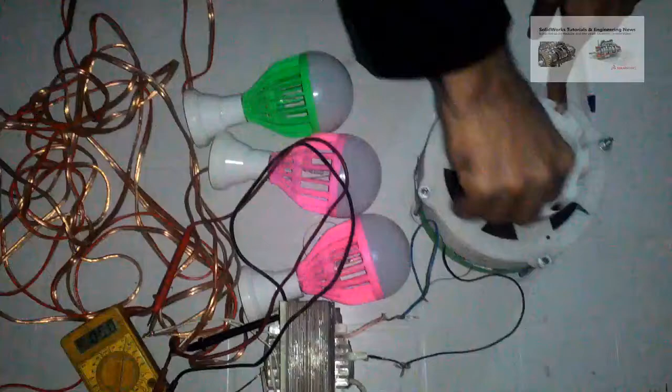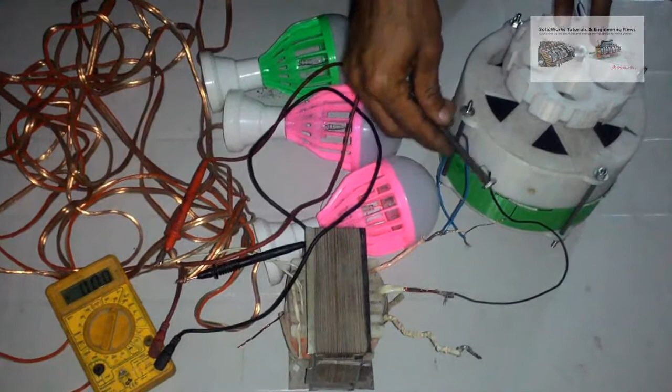In this video, I am going to tell you how to make 3D printed single and multi-stage permanent magnet AC alternator. I will tell you each and everything about this, like number of poles, number of turns, and the shape and size of magnets. I will also share the SolidWorks and STL files that you need to 3D print this alternator.

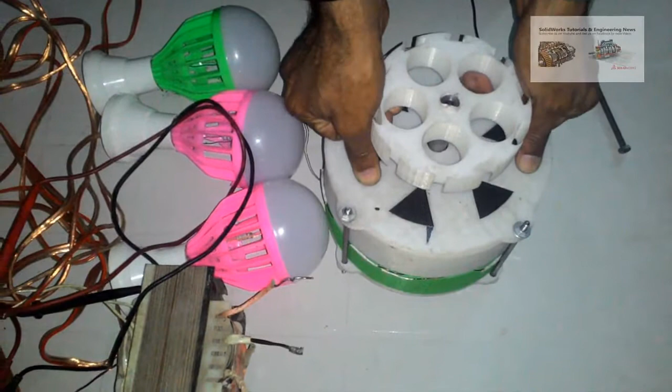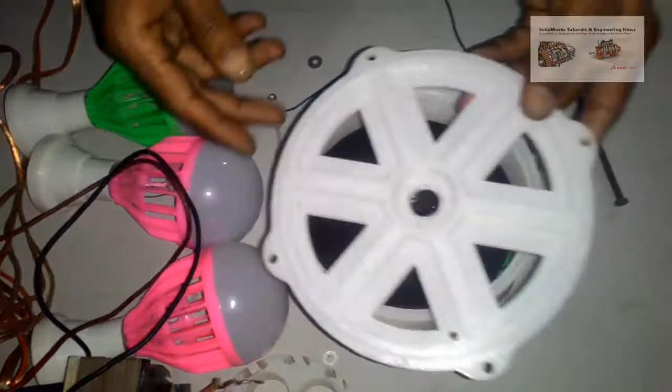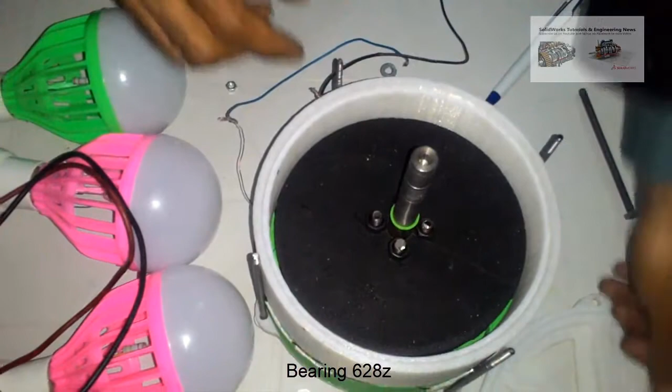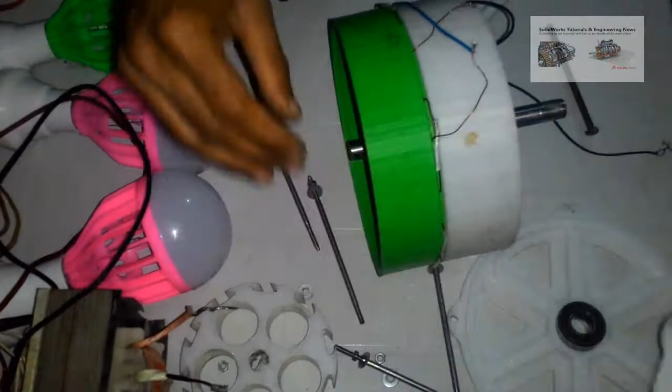Let's disassemble this single stage alternator to talk about its characteristics, and then we will talk about the multi-stage alternator. So let's start. Unscrew these bolts and disassemble it. So this is the side cover, and it also has the bearing slot here. Here is the bearing and the bearing number is 628Z. This is the other side cover with bearing, same bearing 628Z. Both side covers are identical.

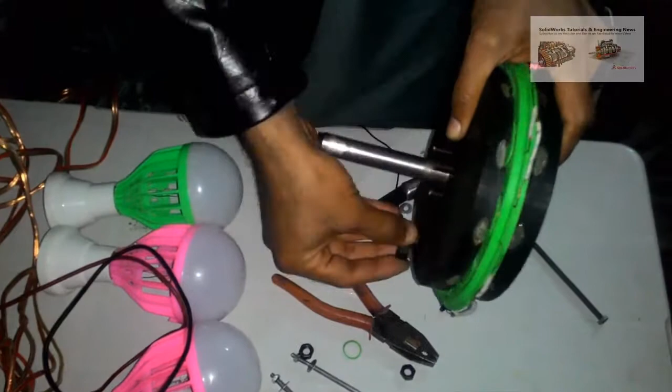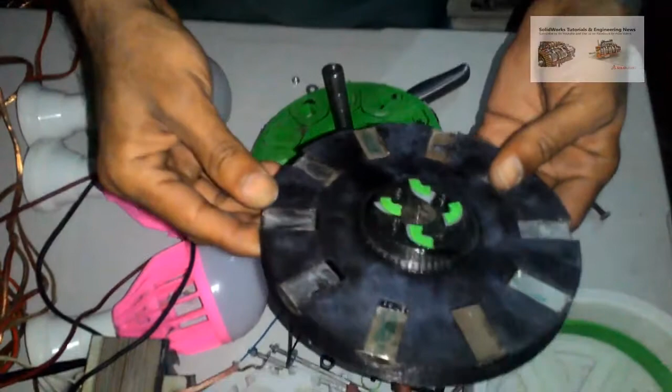This is the outer ring and both green and white outer rings are identical. This green disc is stator and it has copper coils inside it. And these two black discs are rotors and they are mounted on the same shaft. They are also identical and they carry magnets in them. This is the magnet disc or rotor. The magnets are N38 and the total number of magnets are 10.

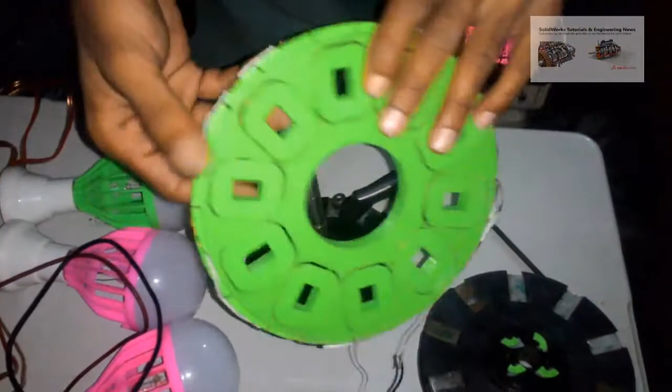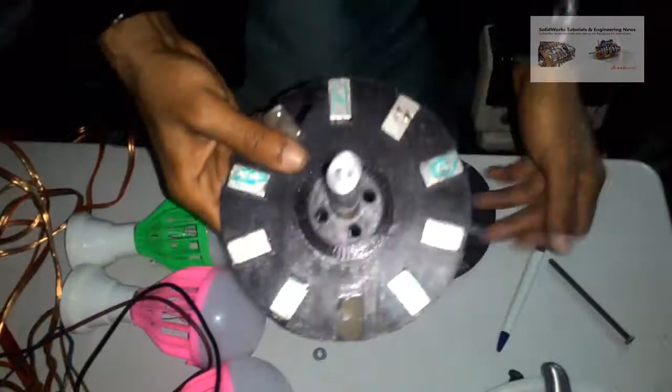This is the stator and it has 10 copper coils inside it. The wire size is SWG23 and number of turns are 80. 10 magnets have been used in one rotor, so total number of magnets are 20. All 10 coils are connected in stator via end-to-end and start-to-start connections. This is the magnet arrangement on the rotor. So the magnets are arranged in opposite polarity next to each other.

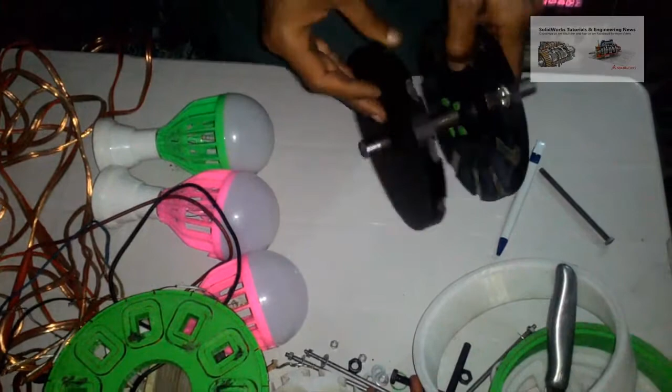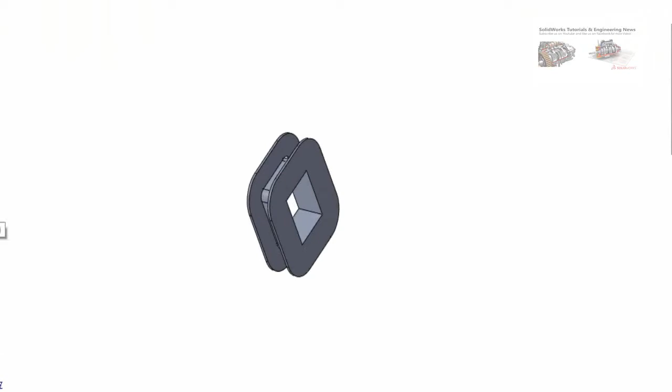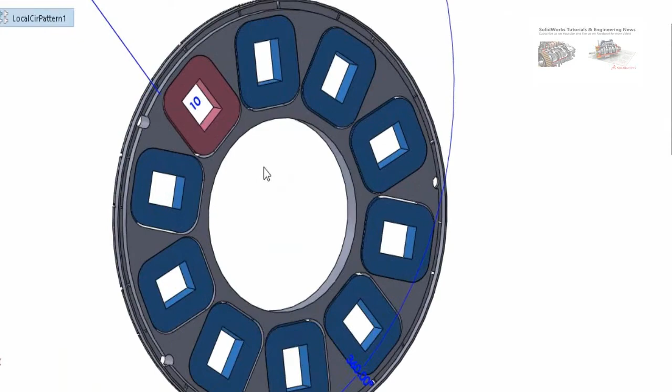Both of these magnet rotors are assembled on the same shaft in such a way that they attract each other, like this. If they repel each other, then they will not produce electricity. You can see the diagram here. This is the casing on which the copper wire will be wound, and this is the stator in which the copper coil has been fitted. So as I told you before, total number of coils are 10 and they are connected via start to start and end to end connections. You can see there are two holes from where you have to withdraw copper wires or output wires from each coil.

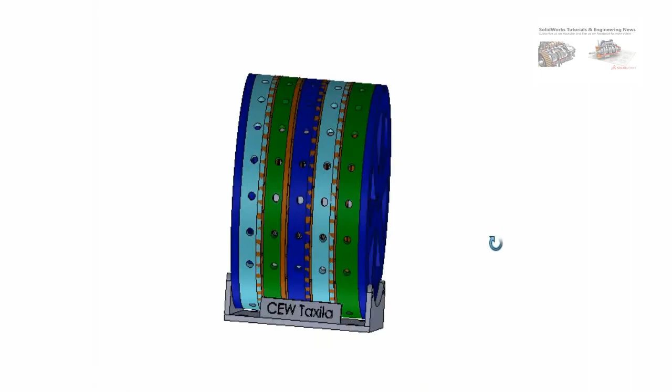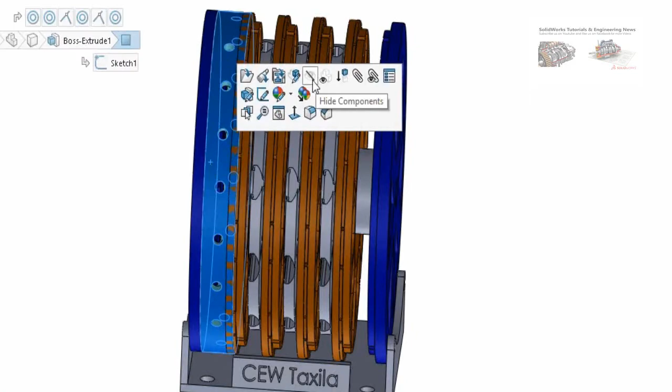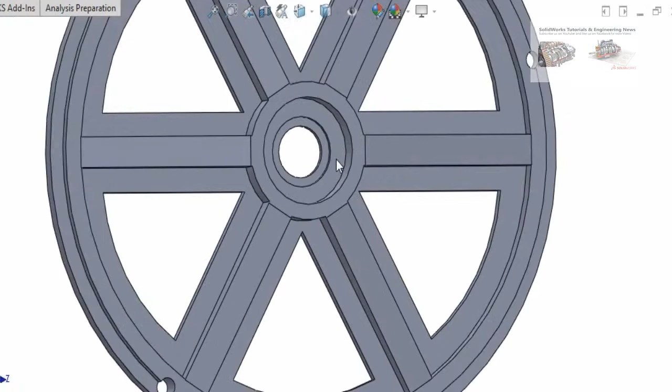Now let's move toward multi-stage alternator. This is the multi-stage permanent magnet AC alternator. It is quite similar to single stage alternator. At the moment I am hiding the outer rings. The discs with brown color are the stators of this alternator, and the discs with grey color are rotors of this alternator. Here you can see these are the rotors with grey color. So here is the side cover, and it has the same bearing 628Z. There are two side covers used in this alternator.

There are 10 coils in each stator, and the total number of stators are 4, while each coil has 410 turns. Magnets are N38, and there are 10 magnets in each rotor disc. Copper wire size is SWG29. Connections are the same as single stage alternator, end to end and start to start connections, while all the four stators are connected in series to each other.

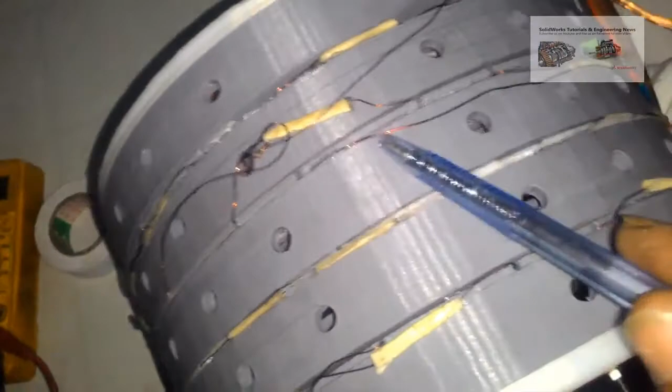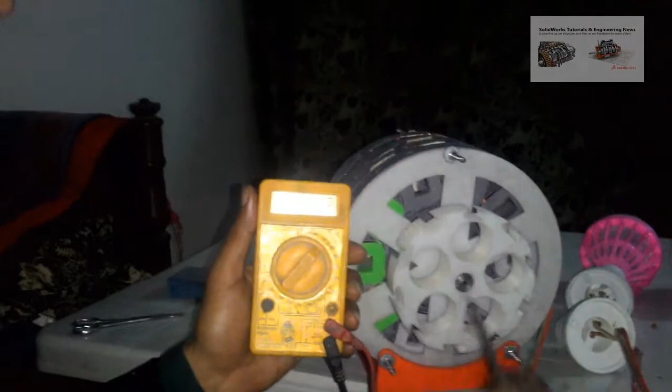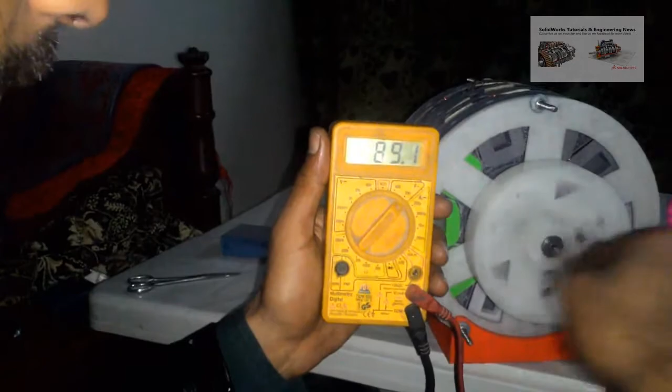Now let me show you its working. So as you can see, I'm rotating it with my hands, and it will produce maximum voltage of 110. Now here you can see I had connected three 12-volt DC lights with it, and you can see these lights are glowing at a very low speed.